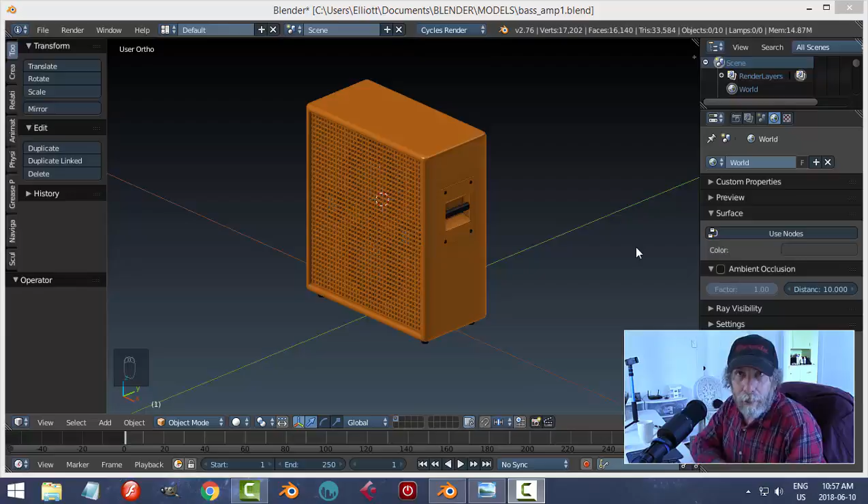This is part 2 of the bass amplifier modeling. Last time we left off we had made the main cabinet and the side handles. That was the main thing really I wanted to do that was different from the guitar amp.

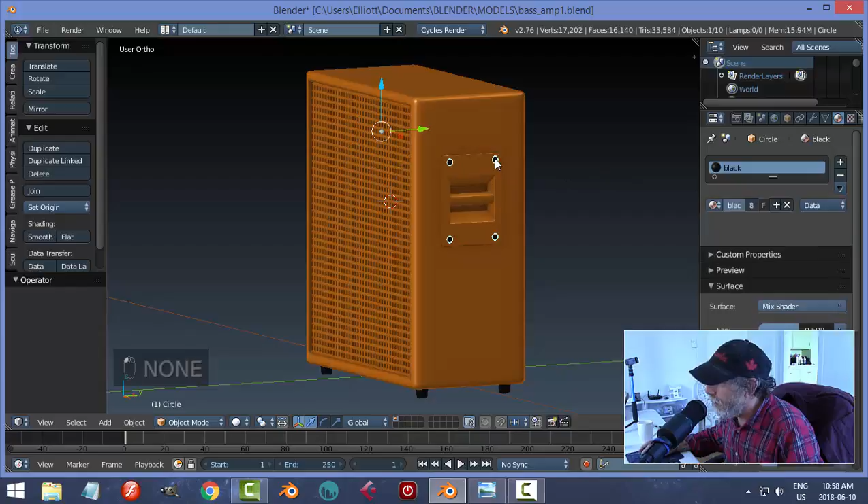Alright, so I want to make a few changes here. First of all, I want to switch those to orange, and I'm thinking about putting the screws in orange as well, so a lot of orange, but we'll see. I might make the handles back in black, but what I really want to do is come to the back side, and I think I'll actually copy the cabinet and move it to another layer, so in case I make a mistake I can always go back.

So what I'm going to do is make the back panel where there's inputs. Very simple. It's going to be a very simple quick video.

So I'm going to go into edit mode, and I'm going to hit Control R, and add 2 edge loops right there. And I'm going to scale this in the X so it's kind of narrow like that. Positioning's fine. I'm using existing edge loops, so that's great.

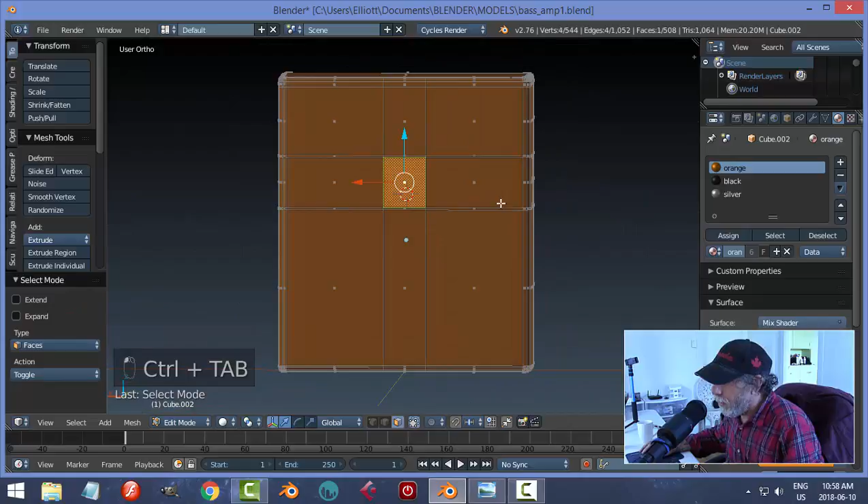So I'm going to grab that face and hit I to inset and just pull it in a little ways for a bit more support. And now I'm just going to hit E to extrude and pull it in a little bit. And then of course I'll get that because we've got a subdivision surface.

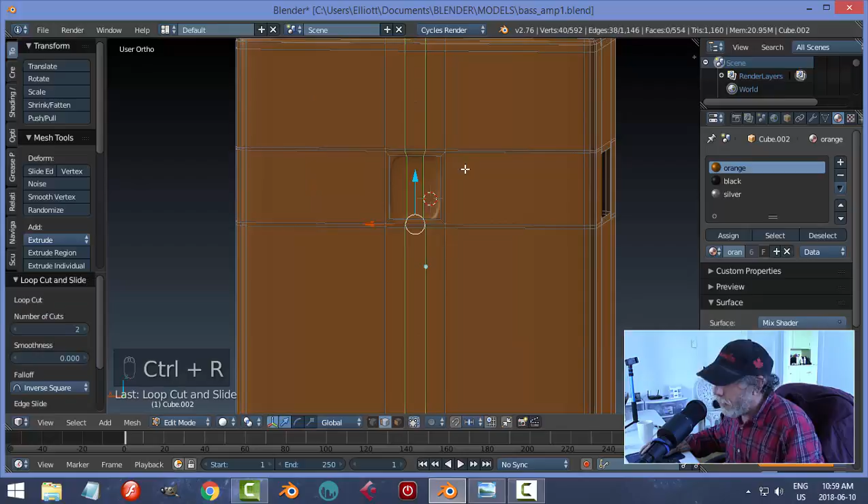And now I'm going to add some more edge loops. Because this is pretty much a square or rectangle, adding those edge loops will not damage anything else or pull anything out of line. So I'll put 2 more edge loops like that and scale them in the X out to the sides. And 2 more edge loops this way, and I'll scale them in the Z by pulling out. I am likely going to need more, so I'll come right in here and go Control R, and get sort of a square one, and do one more out to here.

Let's go into object mode and have a look. And I don't see any major pinching, so we may be okay with that.

Let me just try one more thing. Grab this face and Control plus to get another face a little bit further out. I may try scaling the X a little bit and scaling the Z to angle it down a bit. Let's see if that worked. Nah, didn't do much. Well, I can do some more if I really wanted to, not going to be overly visible. Yeah, we'll go a little bit more—scaling the X, scaling the Z, just accentuate it a bit and try to make it relatively equal, and then we'll have that effect.

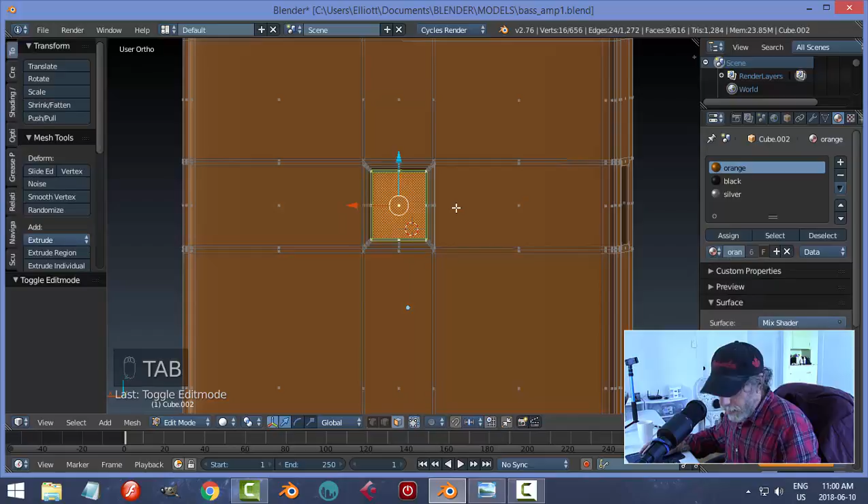Alright, looks okay. I can put more edge loops if I want to. Now what I'm going to do is just grab the center piece for now and use that. Shift D to duplicate it, P to make it a new object, back into object mode, select it and set origin to geometry. Let's move it out so we can work on this.

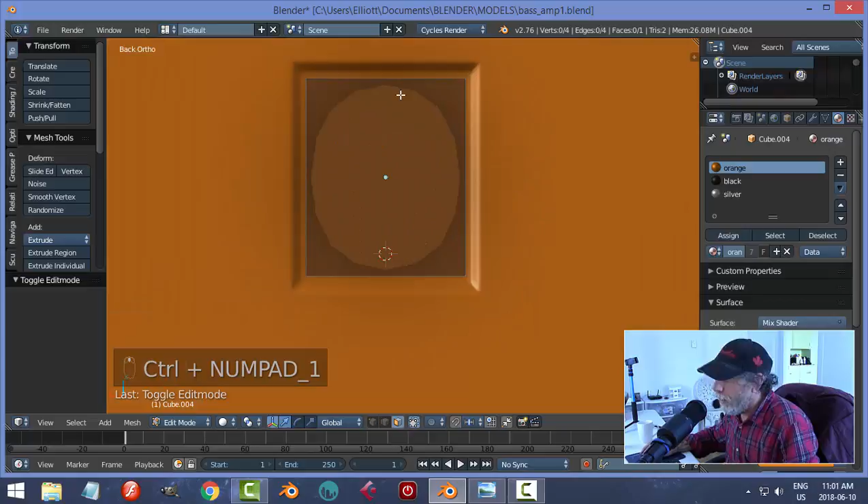Okay, let's go into edit mode on this. Back in, Control 1 is the back. Let's put a couple of edge loops here. Control R, 2 of them, scale them in the X out to the sides. 2 more horizontally, scale them in the Z to the top and the bottom, like that. Make sure I'm on—let's have a look at that.

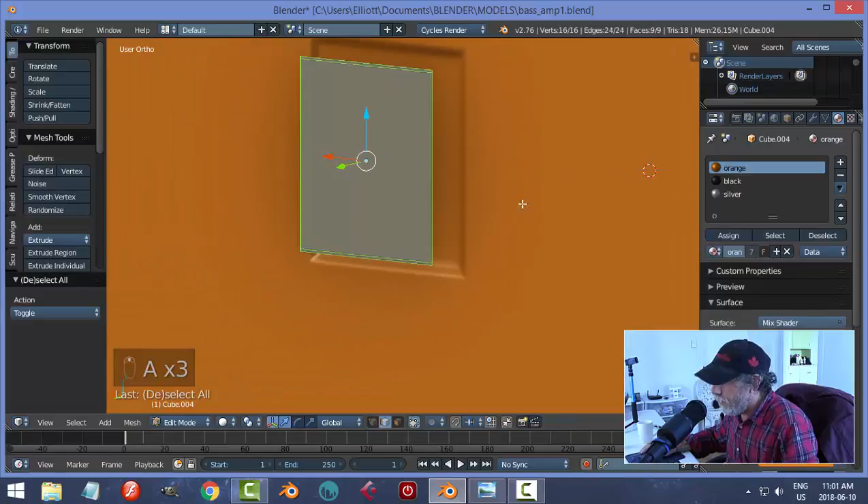Alright, so let's go back into edit mode and select it all, and I'm going to extrude this with E and pull it out. Doesn't have to be too thick, just like that's good enough. I'll come in good and close, and we'll put an edge loop towards the front and towards the back.

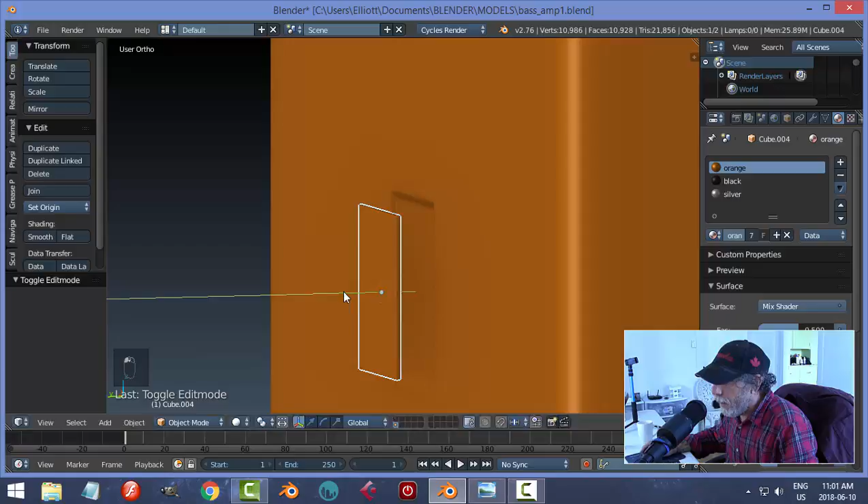I don't think I'm going to delete that back face. Let's try pulling it in and seeing how it fits. Control 1 is the back there, period key to zoom in. Let's go into edit mode, A to select it all, and scale in the Z and bring it up like that. Scale in the X and bring it out like that, and have another look.

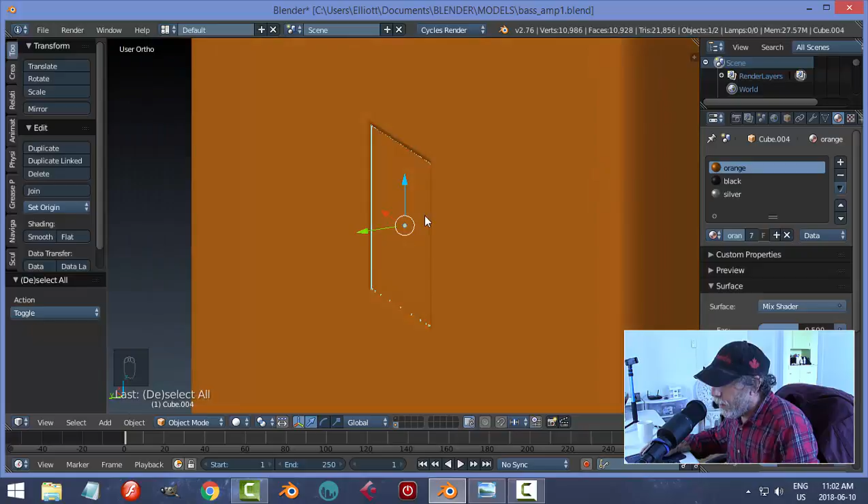Okay, so that could fit right in there. I think it could be scaled a bit more in the Z, like that. I think I'm going to pull it out a little bit. Maybe not, maybe like that. Alright, well, we'll try that.

Okay, I'm going to select it and Shift S cursor to selected, so my 3D cursor is right there. And I'm going to make the inputs now. Shift A, bring in a circle.

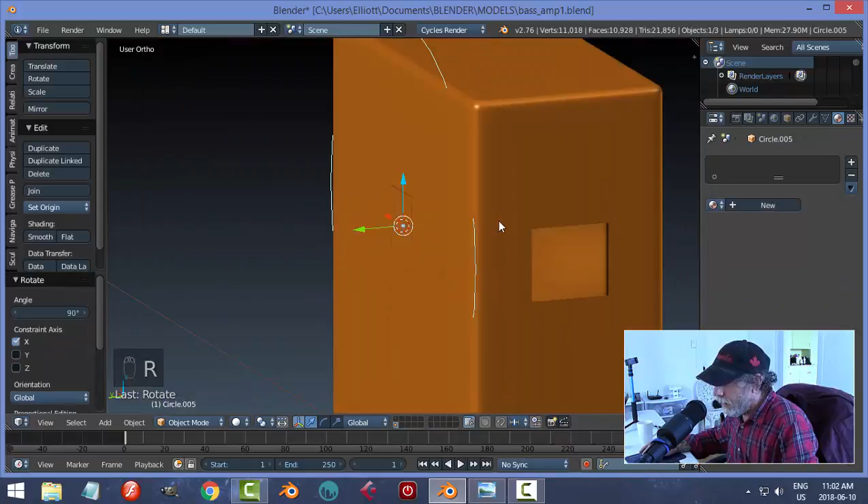Rotate X 90, and let's bring it out a bit. Let's scale it, zoom in, position. Let's scale it some more. I want these relatively big.

Okay, Control A, rotation and scale. And let's go in, I have to make a face. E to extrude. All right, let's select it all and flip polys.

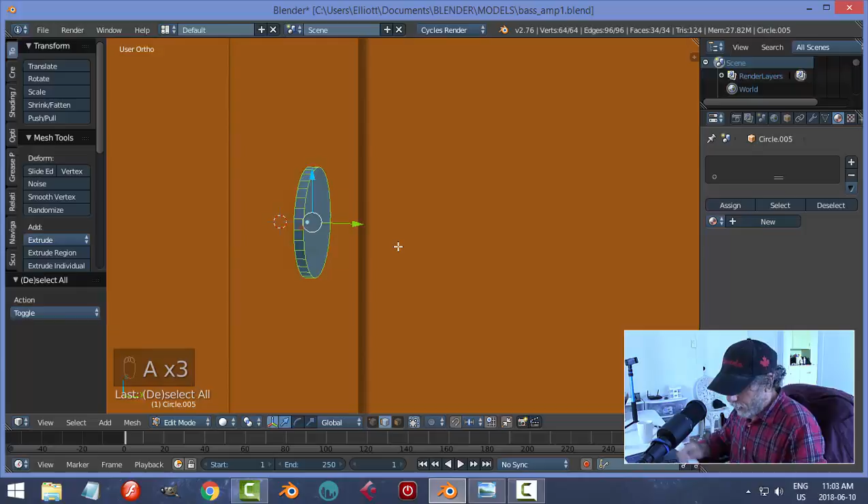All right, let's go grab this face, inset to maybe about there. E to extrude, and bring this out relatively high so I can put a bolt in there. I to inset to about there. E, and we'll just push it back a little ways, not too far.

Let's go to edge selection and grab all these sharp edges, that one and that one. Control B and pull and put in 1, 2 edge loops, just like that.

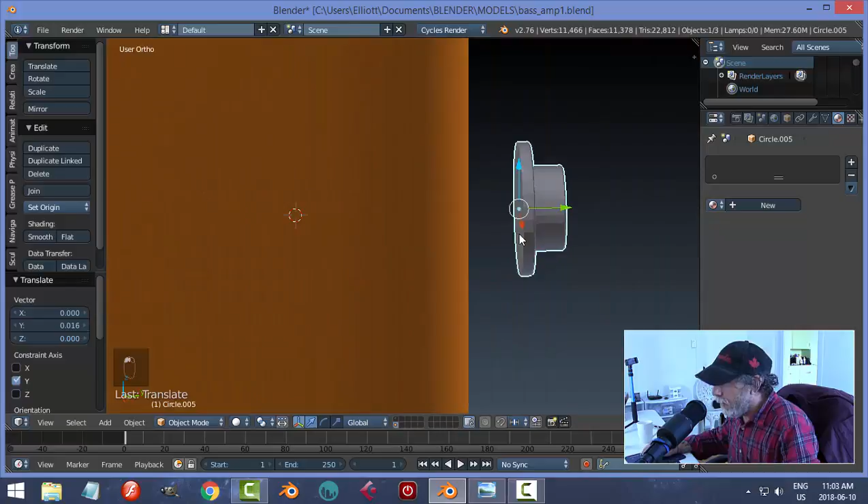Okay, that's going to be fine. And I suppose, I mean, I really could get rid of some of these back faces if I cared enough about it. It's good practice, of course. X faces, I won't need it, won't be seen.

Let's just push that back to there and we'll adjust everything in a bit. Let's make sure that the 3D cursor is right on that. Go Shift A and bring in a cylinder, but let's make sure that it's 6 vertices.

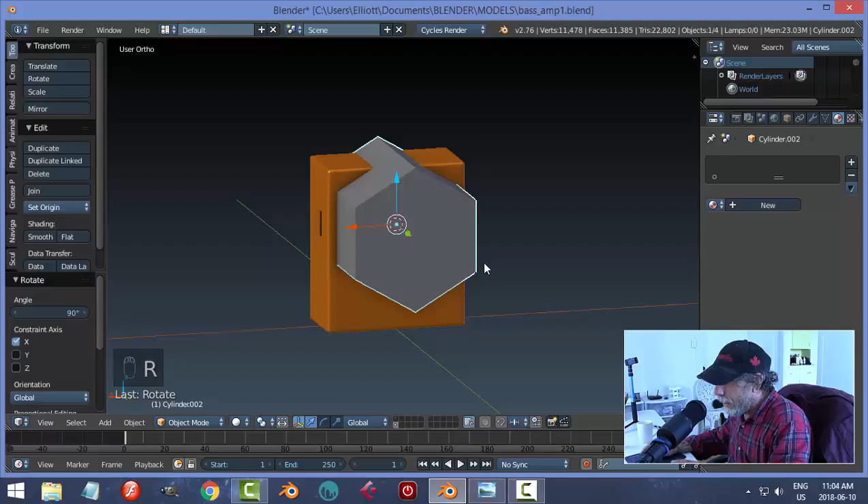And I'm going to rotate this in the X, RX 90. Go to edit mode, it's selected, so scale. Okay, period key to zoom in. And let's scale this in the Y and see where we're at.

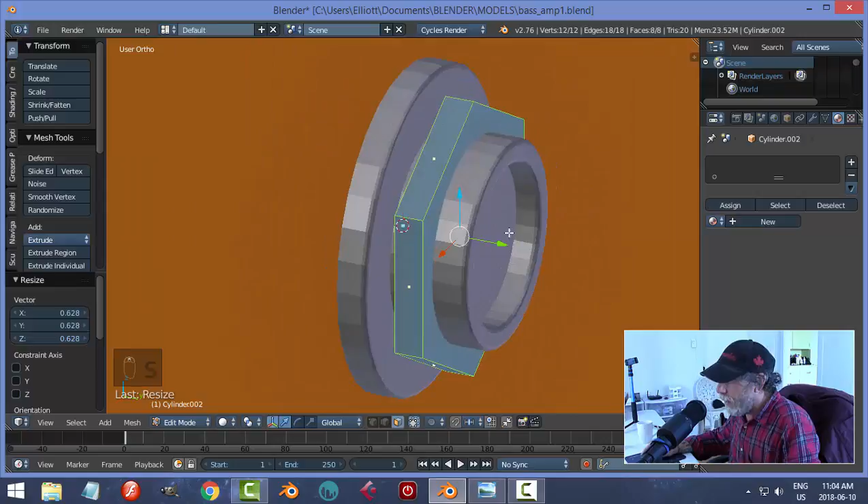Okay, still too big, so let's just globally scale it. Pull it out. And let's scale it again, like this. Push it down and we'll get a sense for how big that is. I think that's probably fine like that.

Let's select it all, Ctrl + N to flip any polys. And let's select that top face and go Control B and just pull down about halfway. Something like that. Just make sure that this edge doesn't go under the cylinder. Yeah, that's all right.

All right, so let's go back into object mode and have a look. That's fine. So I'm going to take the 2 of them and go Control J and join them. As soon as I put on smoothing, I lose some definition.

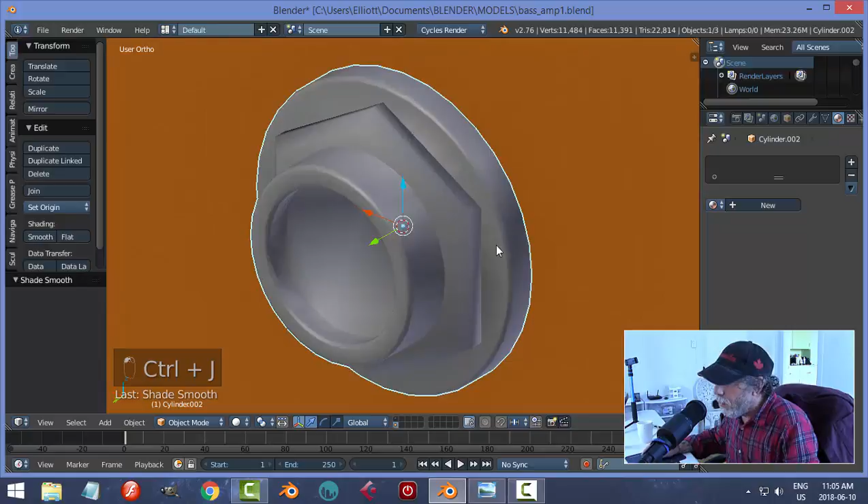So I'm going to come back in and I'm going to select that top face, hit I to inset. I'm going to pull out till the edge is close there. And I'm also going to put an edge loop right here and bring it down. And you can see that now I get some more definition in this thing.

And as for the weirdness on the face of this, I think I'm going to just put an edge loop here and bring it close in and see if that's good enough. You know what, I could put an edge loop in here and see if that... no, it's not going to affect the face, so I'll just grab the face and go E to extrude. Just leave it like that.

Okay, we could go ahead and we could color these. I'm going to make this silver, but I want to make the inside face, I want to make that part black.

So it'd be like this. Yeah, there we go. Okay, so that would be my input, the quarter-inch jack. I don't mind if it sticks up like that. Okay, let's look at the back and decide.

I think I want these up about 3/4 of the height. My 3D cursor's there so I can mirror this and then we'll have a look at that. So I have 2 of them like that.

Okay, let's just have a look at the positioning there. That's good like that. Just remember to save. Okay, the 3D cursor's already on there, right?

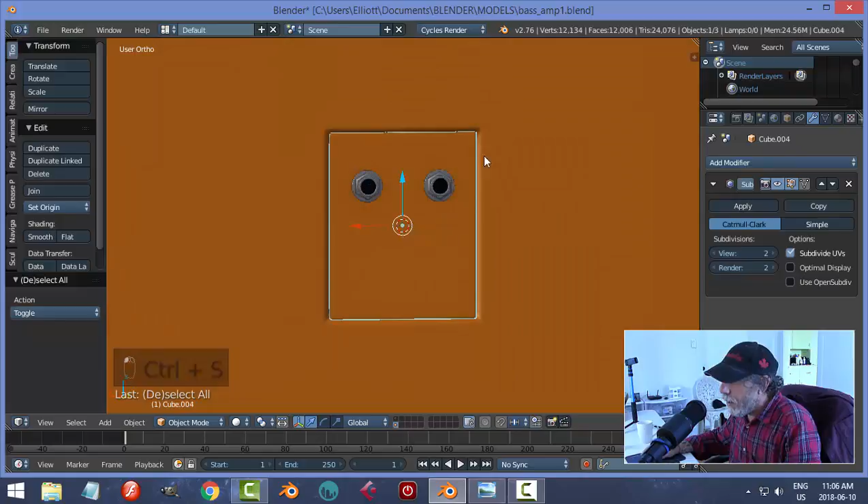So let's bring in another circle. Rotate X 90. These are going to be really simple bolts, not even bolts, circles, extruded circles. Okay, Control A, rotation and scale, zoom in. I want them smaller than this though. There we go, something like that.

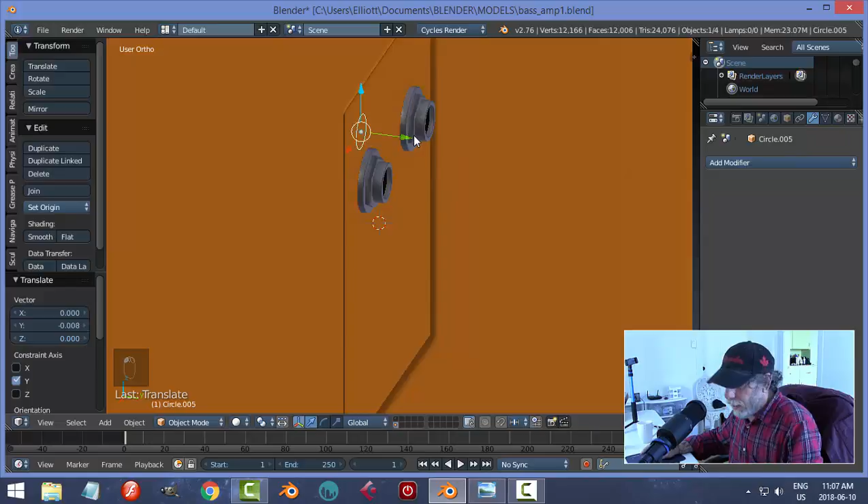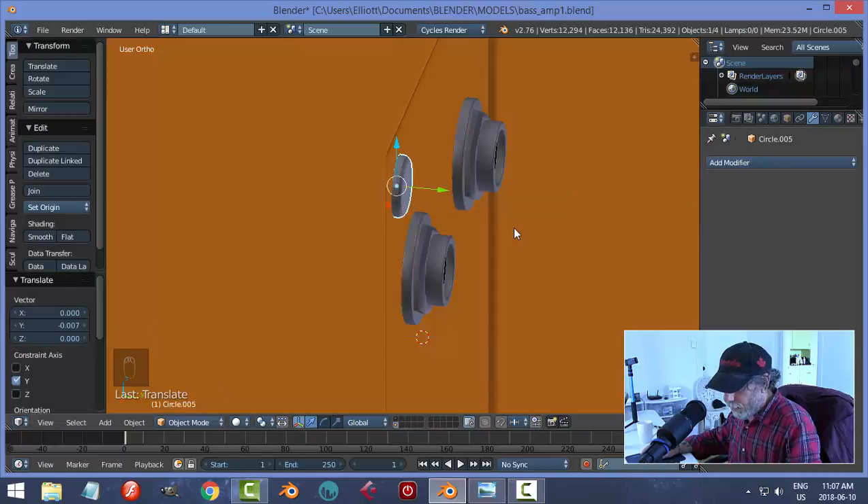Actually, before I do that, let's select it all and Ctrl + N, so my polys were flipped, and push that in. And in object mode, I think I'm going to scale this in the Y and just flatten it. We'll smooth it, and it's still a little bit big, like that.

We're going to make this orange, so it just fits in there. Okay, that's fine.

Select this again. Well, it's already selected and the cursor's already there, so we can go ahead and mirror this in the X and in the Z. I'll hit apply. I just want to double check some things. That's okay.

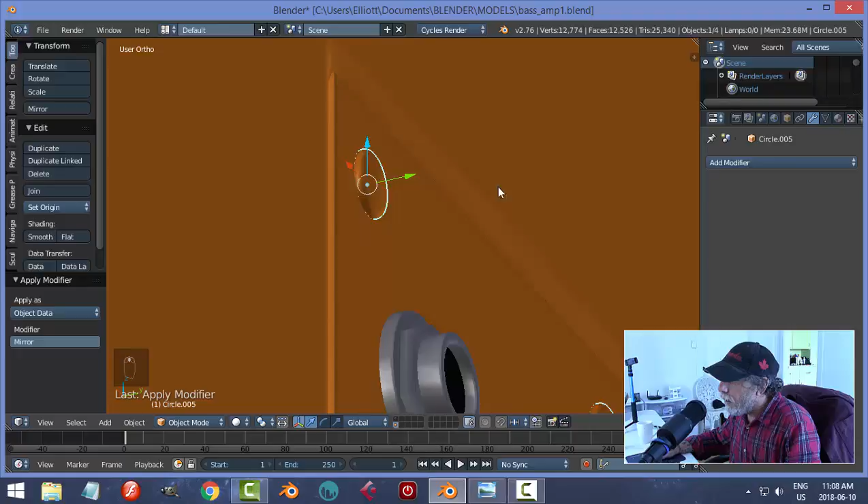I might want to do a bit more work on this. Although, no, that's the slope, isn't it? I don't think I need it sharper than that, so that's probably going to be okay like that.

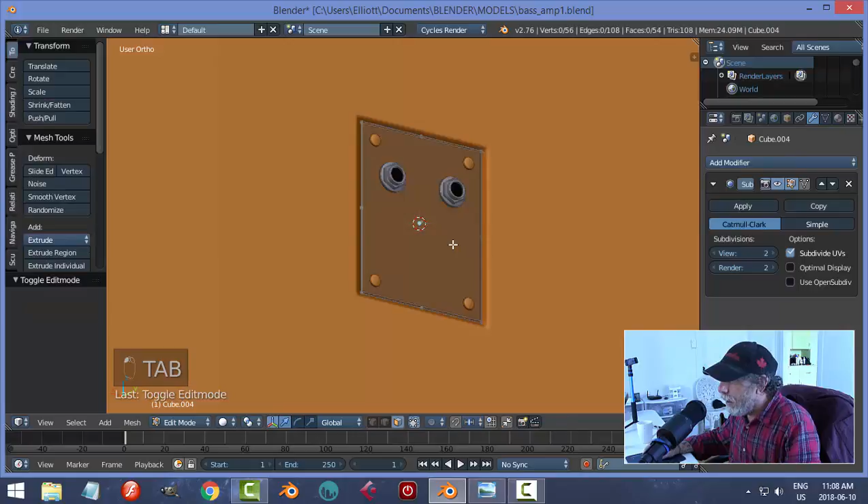I might make a little plate that goes here. I know there'd be text normally, but I'm not sure I'm going to do text. I think I'm going to grab this face though. Shift D, P to make it a new object on its own.

I'm going to get rid of the subdivision surface for the moment. Set origin to geometry. Just pull that out. I don't want it that big, so in edit mode, I'm going to look at it, and there's no bevel on that, so just scale this in the Z

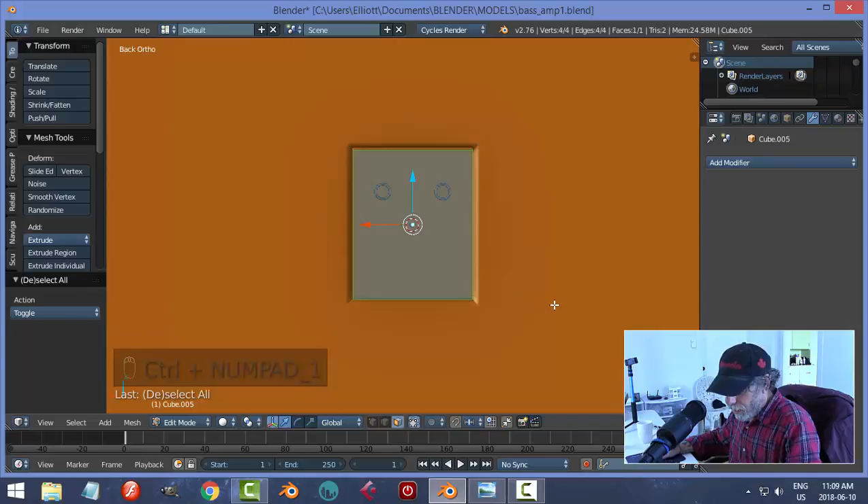and in the X and pull it down and see if I do something there. I think that'd be all right. E to extrude, I'll pull up. I don't need much thickness,

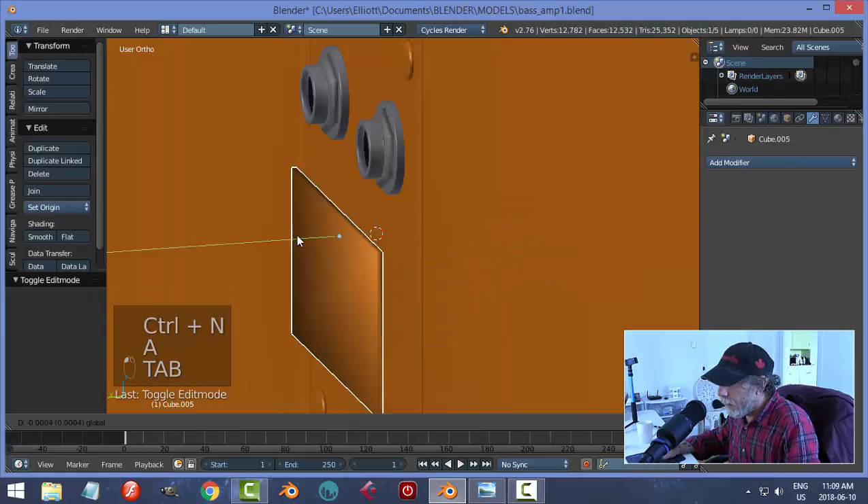but select it all, Ctrl + N. Okay, that's fine. So I got this, I got the shading on it. It's not going to stay like that.

Maybe I will put subdivision surface anyhow, and then do the usual. 2 edge loops here, scale them in the X. 2 horizontals, scale them in the Z. Like that.

Just something. Okay, that being the case, I think I like that. I hope it's not too small. But I think I like it.

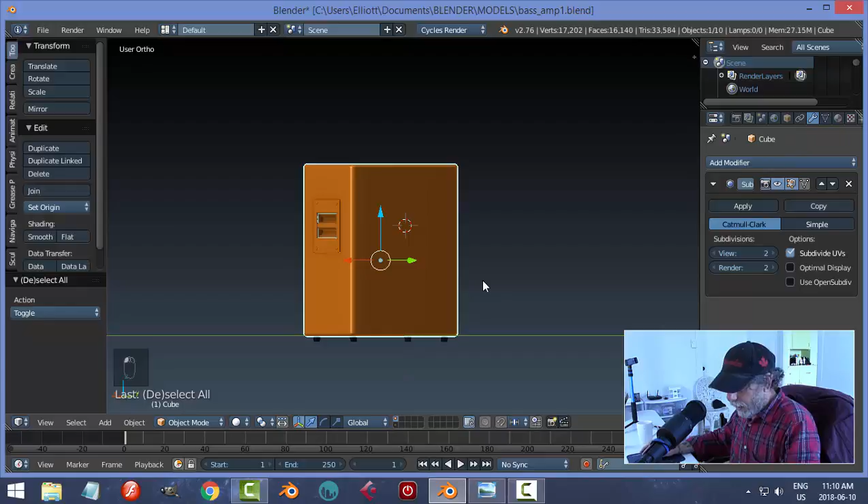So what I'll do is I'm going to take this one, move it just in case, way back to there, just in case. Come back to here, A to select it all, and I'm going to move this to my first layer. And we'll have a look.

That's with everything, and it's just debatable if I want to keep these orange. I was thinking maybe of wrapping a jack cord around one of these and having it draped down, in which case I'd make that black, and I probably would want these orange. But for the time being, we at least have those.

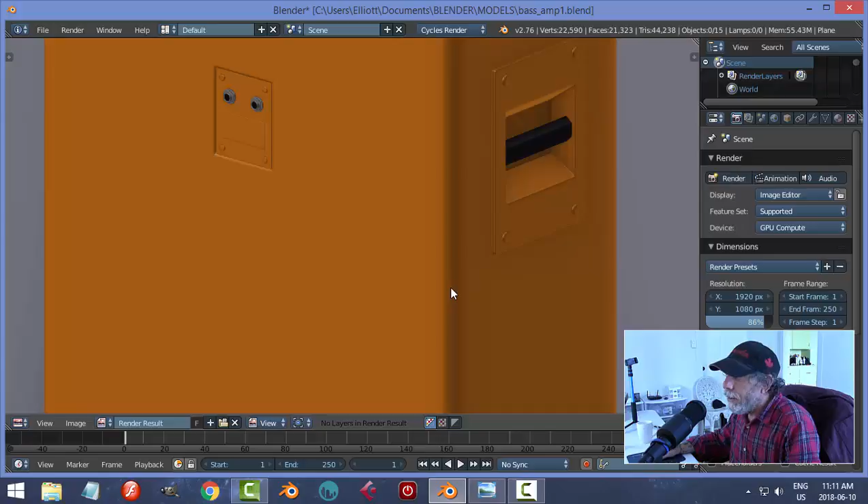So if I bring the plane back in, I guess I lost that, and down, and S8 for now. Get a sense of this thing. It's not much detail to render, but you can see what we got so far.

All right, so that's a quick way that you can make the back plate and the inputs and that kind of stuff.